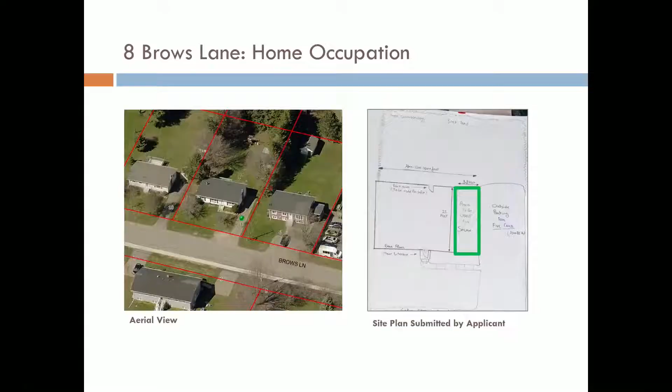So we did receive 1 letter through the public notification process, and it was in support of the application, and that is included in your package if you'd like to review that. So I think we're getting our slide deck up to date here. Thank you, Ellen.

We have determined as a department that this application conforms with the official plan objective to support home occupations in residential zones. The number and timing of appointments, our department is of the opinion it represents a low intensity use of the property that will generate a limited traffic impact on Brows Lane. We feel that the 3 tandem parking spaces are sufficient to serve the proposed home occupation and the main dwelling unit as well. And this proposal does meet all requirements in the home occupation section of the zoning bylaw.

Apart from the parking and the number of appointments, which would be determined by council. Therefore, we're of the opinion it would not detract from or conflict with the low density character of the surrounding neighborhood.

So in light of this, we're recommending approval of this application, subject to the condition that it meets all the parameters that they have put forward for this proposal, and they're outlined there. So if you folks have any questions, feel free to bring those forward. I would note that the applicant is here as well and is open to any questions you folks may have.

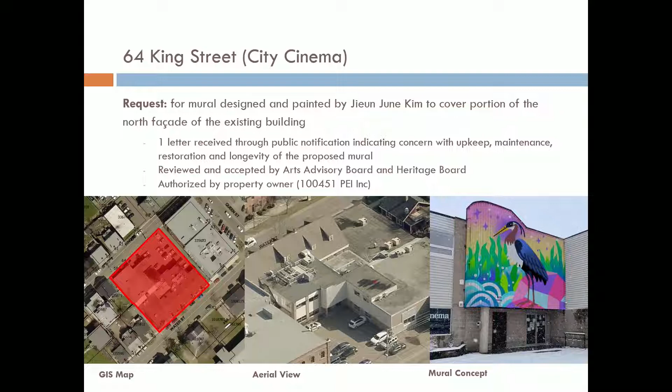You know, there's a few murals in the area, so in terms of the actual details of the artwork, there wasn't anything specific. We gave kind of prompts that related to that area, and the artist provided something that's in his style.

Same with 89 Kent Street, pardon me. The mural concept is very much in keeping with the artist's style. You'll see there's an owl and a fox, which we did request be included just because it's a symbol of PEI.

and also is featured on our crest. We like to make sure that the artist can do something that they like, that is in line with their style, but is also tailored to the particular environment of Charlottetown.

As Councillor Yankoff mentioned, this is a great opportunity to bring in international artists who bring a lot of expertise. Making murals that are 3,300 square feet is not easy. It requires knowledge of using boom trucks and other materials that artists are not usually familiar with unless given opportunities such as this. So we're hoping to build capacity going forward to bring in local artists, local being Charlottetown, but also perhaps PEI, and the Atlantic going forward, to make sure it's art that is for and by Islanders, and this is a great first step.

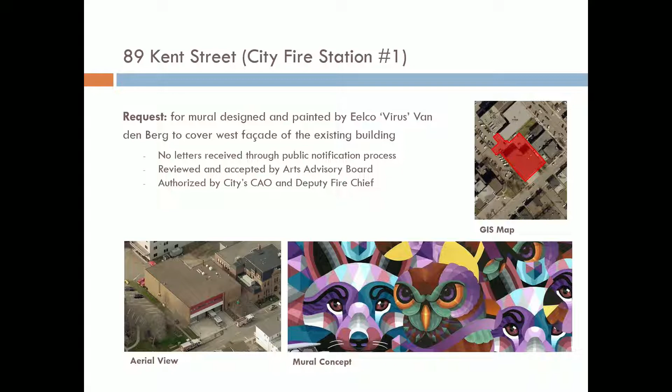Thanks, Emily. Thanks, Doug. We'll go to B of our reports, which is rezoning and site-specific exemptions. The first one is 15 St. Dunstan Street, PID number 388215, and I believe Robert Zilke is here to do the presentation.

Thank you, Emily, very much. Just waiting on Robert. I see him coming there. Yeah.

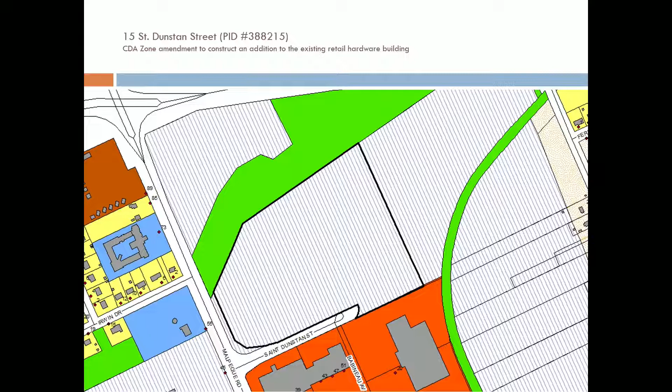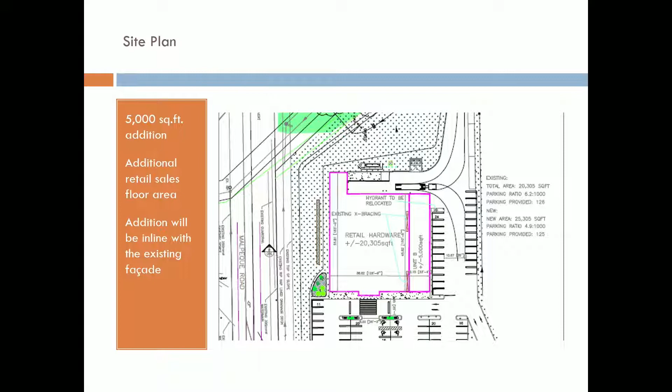So it's 15 St. Dunstan Street, Robert? Thank you, Mr. Chair. So this is a request to approve the amendment to the CDA zone, and the property location is 15 St. Dunstan Street. It's the existing site of the existing Princess Auto. The point of the CDA amendment is to allow for a 5,000 square foot addition to increase the retail floor sales area. This is where the addition will be, situated to the east portion of the building.

As the board will recall, there are environmental protection regulations in place due to the Ellen's Creek Watershed Protection Buffer situated to the north. The existing development agreement does contain provisions to minimize construction impacts on the creek itself during situations for runoff and fill placement. So those provisions will still stand if this were to be approved, since that runs along with the property via development agreement that's registered on title.

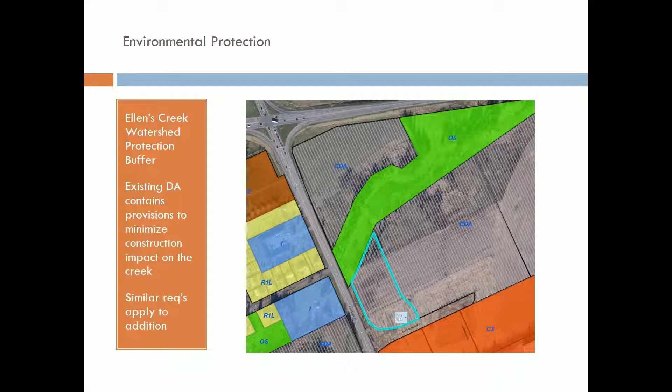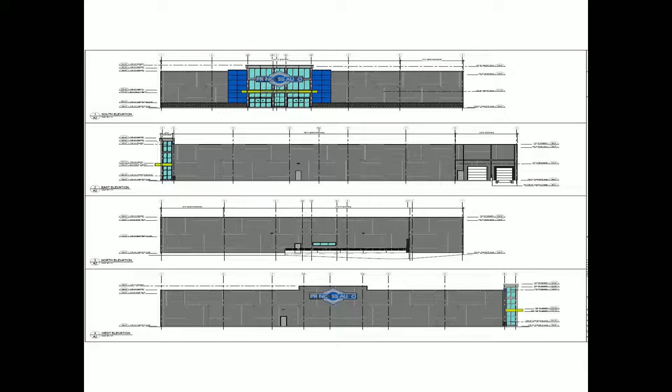So this is the existing Princess Auto building, and this shows the additional retail floor area that is going to be constructed. And this is the revised elevations that the applicant submitted, which we showed at the public meeting itself. Our recommendation is to approve and amend the CDA zone as it relates to Appendix B, inserting that property for site-specific amendments, as well as altering the development agreement and reattaching the revised site plan to allow for the 5,000 square foot addition. I can take any questions.

Thank you very much, Robert. Any concerns, questions, comments? Pretty straightforward. Okay, so we'll need a motion here to either agree or disagree with staff's recommendation. So moved, in favor, moved by Bob Kenny, seconded by Councillor Yankoff, that we update the existing CDA development to allow the 5,000 square foot addition. All those in favor? That's everyone again. Thank you very much. Moving along pretty good here.

And before we go any further, excuse my ignorance, but I forgot to introduce our acting CAO, Donna Waddell, to Planning Board. It's a dear committee that she likes to keep an eye on, and I'm glad. Yeah, I've been watching her for a long time. Well, welcome aboard, Donna. My regrets that I didn't. Yeah, we're all under the eye.

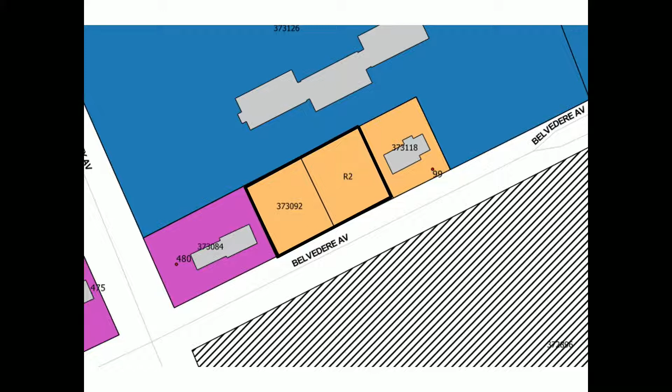It's good debate, guys. It's good to ask these questions for sure.

Okay, number 5, Sandlewood subdivision, extension of Mutch Crescent, PID number 773051, and it's a request for a rezoning, so I'll leave that on the floor to Laurel. Thank you.

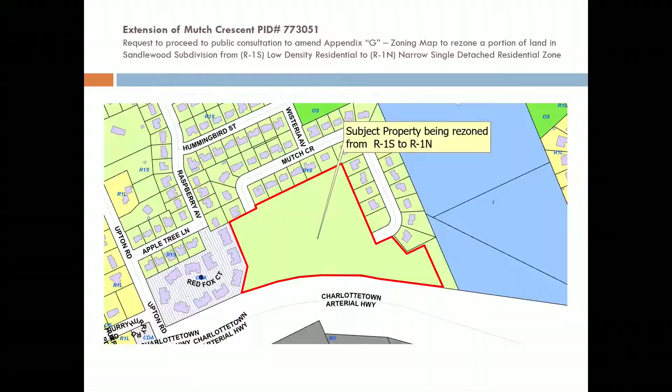Through the Chair, what is the lot size that's required, the width of the lots, when it's an R1N? Laurel, you got that? Let me grab that in the bylaw. I believe it's 39 feet, just a moment, I want to make sure I'm correct. It does say somewhere: for an interior lot, the lot frontage is 34.8 feet, and that's for a single detached dwelling. With the current zone, which is also for single detached dwellings, the lot frontage is 59.1 feet.

I don't believe the developer is going to the frontage of 34.8 feet, but I would have to clarify that. But he's worked it out that there would be an additional 17 lots, so some of them would probably meet that minimum requirement, and then some of the other lots would be a little wider.

So if the lot is 34, or even 35 feet, my understanding is it's 6 feet between the house and the property line as the minimum. The side yard setback is 6 feet from the house to the property boundary on each side, so it's 12 feet between dwellings. That's the same as in the R1S zone or the R1L zone. Same requirement for side yard setback, so it's just that your frontage is narrower. That would leave approximately a house no more than 23 feet wide. Yeah, so they are narrow frontage homes, some of them.

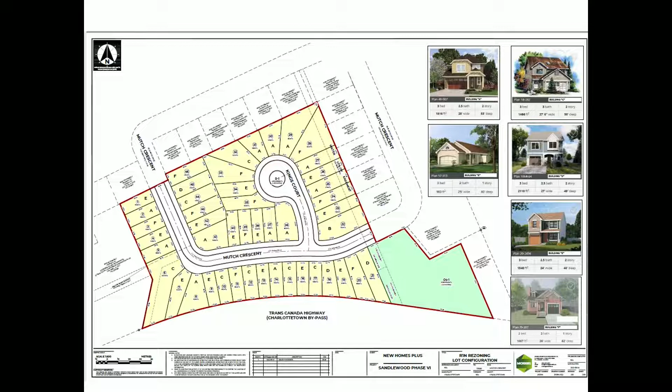Thank you very much. Okay, moving on to 50 Cumberland Street, PID number 679381, and Laurel, you're on the floor again.

Thank you. So this is a request to proceed to public consultation to amend a development concept plan in the comprehensive development area zone for the construction of an industrial equipment building on lands owned by Maritime Electric. The uses listed in Appendix B in the Zoning and Development Bylaw currently lists an industrial equipment building utility power plant, so the appendix will have to be amended to reflect that.

The request is to allow the construction of a new industrial building. The application involves the demolition of the existing steam plant and the steam stacks. Section 44.25 of the Zoning and Development Bylaw requires that amendments to a development concept plan be approved by council, and that amendment or approval process must be treated as if it was an amendment to the Zoning and Development Bylaw.

which will require notification to property owners within 100 meters. The bylaw also requires that the working site plan and buildings also be approved on the recommendation of Planning Board. The developer is submitting a site plan and architectural drawings for the requested building at this time, so the approval will be for the review and approval of the actual architectural drawings currently. The site is at 50 Cumberland Street,

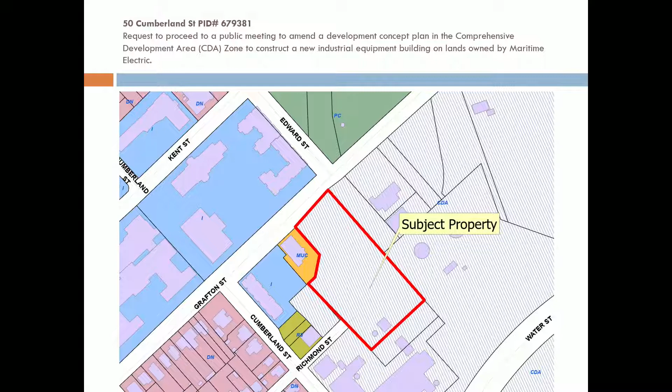The steam building currently houses equipment for Maritime Electric's 50 megawatt combustion turbine generator, and the equipment will be moved to the new building once the steam plant has been demolished. The new building is 2 stories. These are the elevations: it's 25 feet high, 55 feet wide, and 65 feet long.

Maritime Electric has indicated that construction of this building will be in 2 phases. The first phase is slated for this fall, and the second phase would proceed from December 2022 to November 2023. They've also submitted a stormwater control plan developed by CBCL for the project. Over the past few years, Maritime Electric has implemented a tree planting plan, planting approximately 100 new trees to create a landscape buffer around the property.

The existing steam plant located along Cumberland Street has a significant industrial presence along the streetscape, and the west side of Cumberland Street is zoned downtown neighborhood. Properties along this portion of the street consist of single detached, semi-detached, and converted dwellings. This side of the street is mostly low density residential, and demolition of the steam plant will open up this area and provide more buffering between the industrial use and the low density neighborhood, since the building will be moved further back on the property.

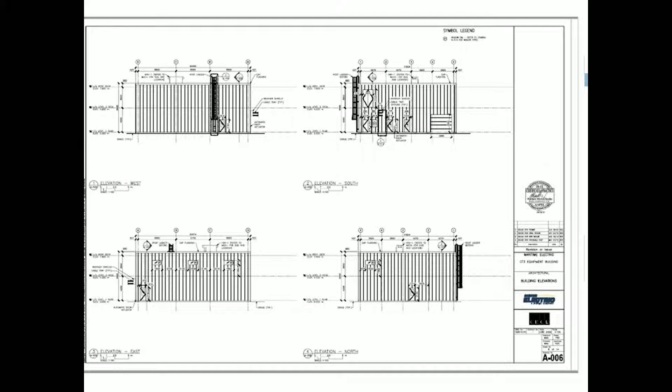Number 7: 257 Mount Edward Road, PID 390674; 261 Mount Edward Road, PID number 390682; 265 Mount Edward Road, PID 390708; and 269 Mount Edward Road, PID numbers 390757 and 390690. Request to proceed to a public meeting.

Laurel: This is an application to proceed to public consultation for approval of a development concept plan, a rezoning, an official plan amendment, and approval of a lot consolidation. The area in question is outlined in gray, you can see right there.

The bylaw requires that the working site plan and buildings also be approved on the recommendation of planning board. So even though this is being submitted for the rezoning and development concept plan approval at this time, when this application comes back for building permit approval, the building plans will have to come back to the board for approval.

The property in question is approximately 10.97 acres. It's bounded to the north by CDA zone land owned by the Board of Governors of St. Dunstan's, to the east by Mount Edward Road, to the south by additional CDA zone land, and to the west by the Confederation Trail.

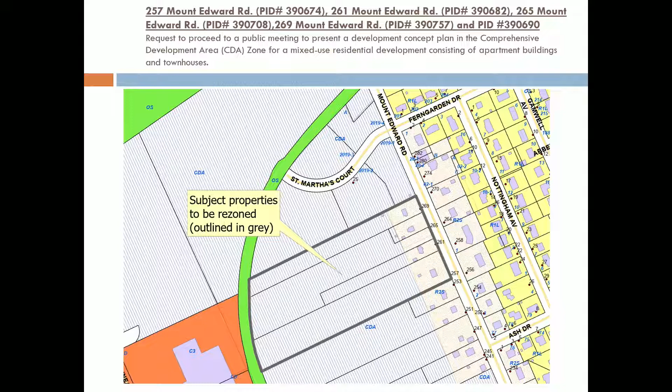So it falls from Mount Edward Road back towards Confederation Trail - higher here and then lower down here. The 6-story buildings are shown to be located at the back of the site, and the 4-story buildings are located closer to Mount Edward Road. This is a site plan showing more of the landscaping and where the buildings will be located and parking, etc. The total proposed unit count for apartment buildings is 344 units.

Building A is to house 90 units, Building B 28 units, Building C 28 units, Building D 114 units, and Building E 84 units. Staff would note that there is no density requirement in the CDA zone. However, if staff were to apply a calculation for density in the R4 apartment residential zone, 385 apartment units would be permitted on the site.

The concept plan also proposes 4 stacked townhouses with a total unit count of 26 units along Mount Edward Road, right along here, and the existing dwellings that are currently along Mount Edward Road would be demolished to accommodate these. Parking for the townhouses is to the rear of the buildings. Individual driveways are not proposed to access Mount Edward Road.

Instead, one central access from Mount Edward Road is proposed to serve the townhouses. This central access will also serve the apartment buildings, and access to the apartment buildings will be temporary from Mount Edward Road. A new public road will be constructed to allow for adequate frontage for the apartment buildings - this road here is proposed to be constructed. Driveways will be constructed off of that road to the apartment buildings to provide lot frontage.

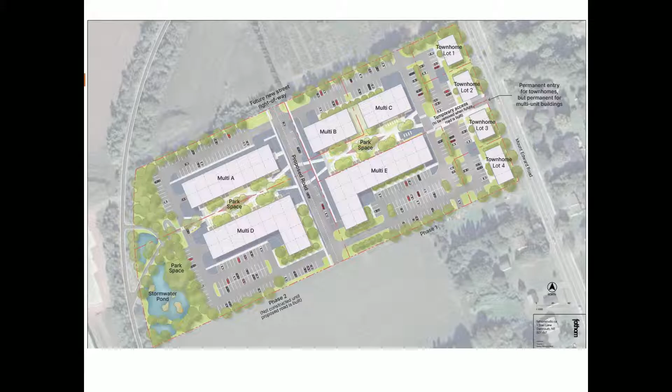Okay, so moving on to C, number 8 on the agenda, zoning and development bylaw, PHZD.2, proposed amendments to the zoning development bylaw in relation to permitting pool covers to replace fence requirements. I believe Alex is away, so Laurel, I assume you're here?

Yes. So my screen just changed from the presentation, and I can see everyone on my screen now. Oh yes, there isn't actually a presentation for this. Good point, Ellen. So I'm going to wing this because this isn't my application, and I've reviewed this to the best of my ability.

But basically, this is to bring this bylaw amendment to a public consultation. The request is to amend the bylaw, section 4.3, to allow certified pool covers as opposed to fencing around swimming pools. So we did have a request from a property owner to amend the bylaw to build in these certified pool covers that are supposed to replace fences and are sturdy enough to support a person if they were to fall into the pool. It would protect them from actually falling in the pool, but would support them and not cause a drowning.

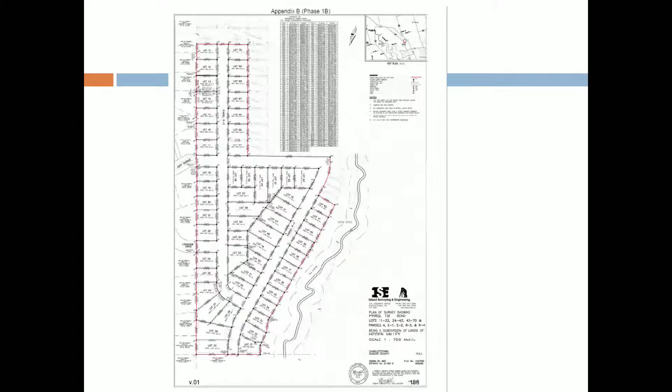So basically, this was a reconsideration for approval of a preliminary subdivision plan on April 26, 2022. The subdivision plan was for a 90-lot subdivision at 339 Malpeque Road. The total acreage for Phase 1 and 2 of the subdivision is 41 acres. The subdivision plan was attached to your report, I also have it right here. So there's 2 phases, Phase 1 and Phase 2.

So on April 26th, preliminary approval was granted. On May 16th, 2022, staff received a request from Janet Roach to have the decision reconsidered by council. Staff were subsequently advised that there was also a separate appeal filed by Catherine Morris to the Island Regulatory and Appeals Commission. And even though there are separate parties involved, they did agree to hold the appeal at IRAC in abeyance until the reconsideration was determined by council.

So the primary concern of Ms. Roach relates to the traffic impact of the proposed 90-lot subdivision in relation to the adjacent developed residential subdivision, Highfield Heights. In particular, she states that there should have been an independent traffic study prepared to review the various impacts of the expected volume of traffic on the local streets from this new subdivision. So the appellant, based on their appeal, cites Section 3.153C of the bylaw, alluding to the fact that there was clear doubt as to the correctness of the order or decision in the first instance. So that is what they base their appeal on.

So when reconsideration is requested, there's what we call a threshold test that's required to be met. The application must pass this threshold test and provide sufficient particulars in the request to show that it falls within the stated grounds contained in Section 3.153 of the Zoning and Development Bylaw. Basically, council may review, rescind, change, or vary any order or decision made by the development officer or by council, provided that new material facts or evidence not available at the time of the initial order or decision have come to light, a material change of circumstances has occurred since the initial order or decision, or there is clear doubt as to the correctness of the order or decision in the first instance.

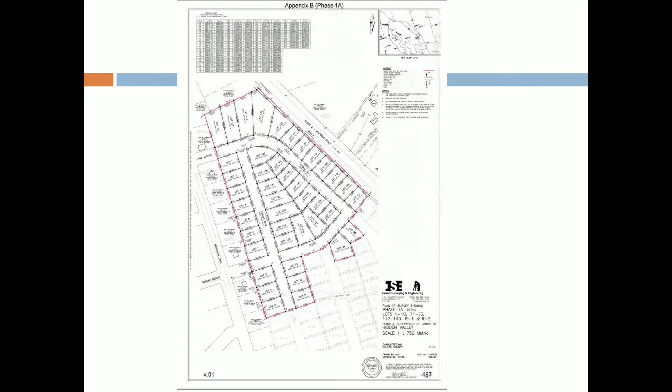Moved by Councillor McCabe, seconded by Councillor Yankov. Any other questions or concerns? If not, let's vote. Anyone in favor of the motion, please raise your hand. That includes everyone, so it's unanimous that we take staff's recommendation.